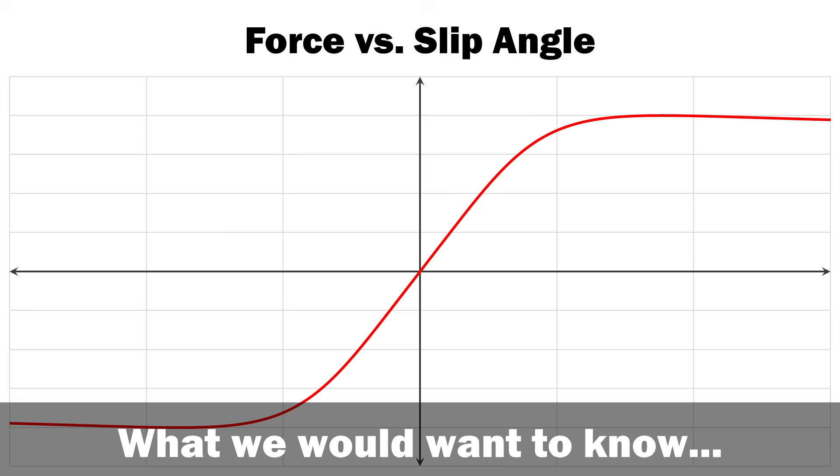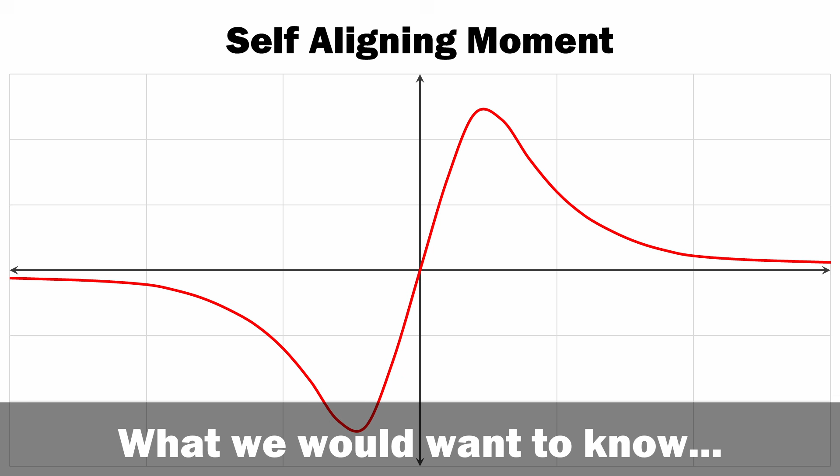If we wanted to make an ideal decision, we would want a lot of tyre testing data. A tyre's grip depends on the slip angle, slip ratio, temperature, pressure, load, and the camber we're running. We would want this test data for every tyre we're considering. We'd also want to know the self-aligning moment, so we can design our steering geometry, and the overturning moment, so we could better determine the loads going into the wishbones and hence into the chassis. We would want stiffness data - vertical, lateral, torsional - and a good idea of the lag of a tyre: how long it takes a tyre to generate its full grip once new conditions are applied.

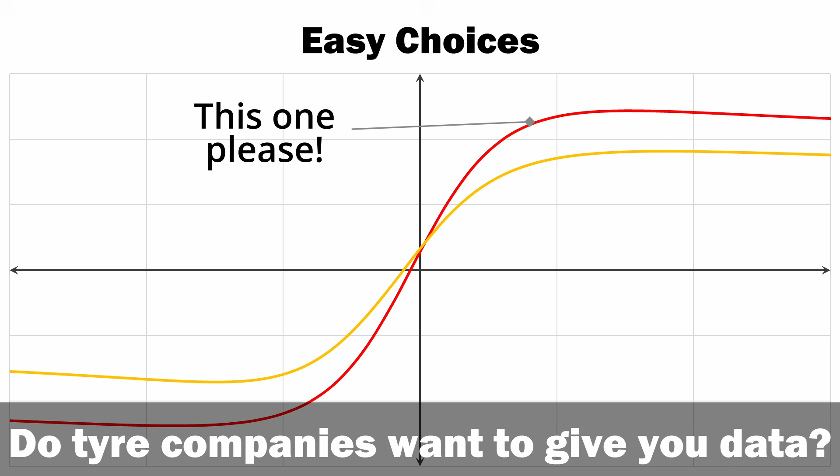Now, if you don't know a lot of those terms, you're not at too much of a disadvantage, because the tyre companies do not provide this. It's very difficult to get a hold of this sort of information unless you've got access to the testing data yourself. Tyre testing of numerous tyres is well outside the budget of this project, and anyone building a custom vehicle at home is really not going to have access to that data. I don't want to be cynical, but it's pretty obvious that if all the companies gave really accurate data about their tyres, there would be fewer choices people would make. If you're looking for out and out friction, you'd just choose the tyre with the best friction. So instead, we get less data, less valuable data, less depth in our data, and a lot more marketing.

Now, if we don't have that data, a really good substitute would be experience. If we had run all these different tyres on cars before, we would know how a particular tyre feels in a car, and if we're looking for out and out performance, which we're not on this project, we would also know the lap times we'd get. But I haven't built this car yet, and I don't have a huge amount of experience testing and tuning these sorts of tyres on cars of this size and power. So I don't even have that experience to draw from. Just like with a lot of design and engineering decisions, we're stuck not having perfect information.

But we still have to make a decision. So before making a decision, it's handy to think about the particular goals that we want from these tyres. And straight up, we're not building a racing car. And that means we don't need the best performance possible. We just want reasonable grip. In fact, I think I might have even chosen a tyre that might have too much grip for what we want.

Another thing to consider is that this is going to be an open top car, and I live in Perth. Perth doesn't have a lot of rain. Most of the time we have fine weather. And with an open top, I'm not going to be rushing out to drive this car in the rain very often. So I don't really need a tyre that has great wet weather capability. Just enough that if I am in those circumstances, I'm not going to get thrown off the road immediately.

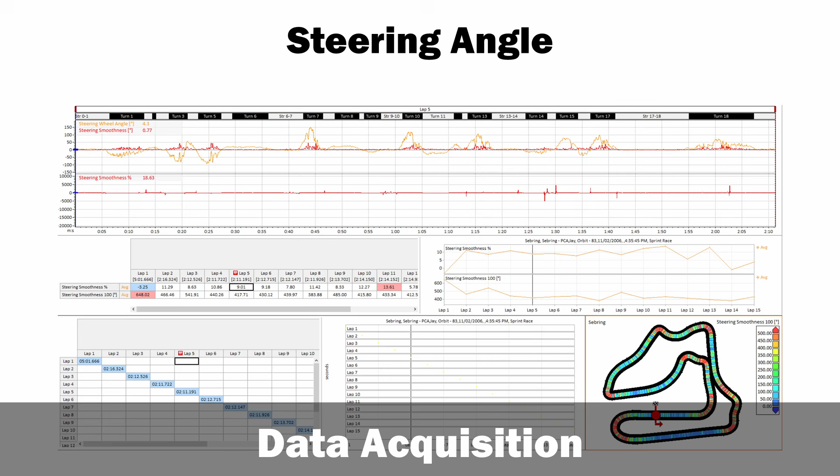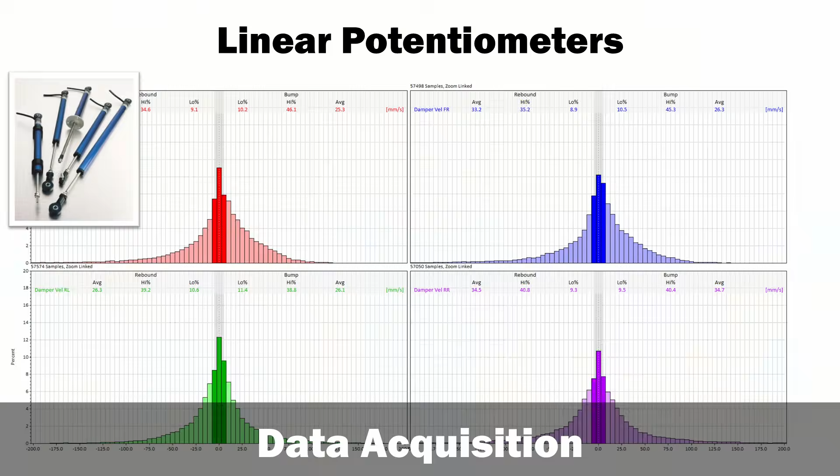If I go a little bit further, I can have sensors running on the car, things like steering position sensors, which give you an idea of how much you're working the front end, but I can also put tyre temp sensors on, linear pots to give an idea of the deflections in the spring and where the kinematics is going to be for a given suspension system. I can also look at putting maybe some strain gauges on the dampers to get some direct measurement of loads that will be going into the tyres. And if I get super adventurous, I might use a slip angle sensor.

Well, that's a little bit out of reach, isn't it? A slip angle sensor, they can cost tens of thousands of dollars. But if you happen to know where one might be sitting around that could be borrowed, like I do, might be an option come testing time.

So the main thing is not to pick the perfect tyre for the car, it's just to pick a family of tyres where there's a few different options. So I really need a short list of tyres that I'm going to run, because as you do lots and lots of tyre testing, that cost can build up quite dramatically. I hope I get it right out of the box, but I don't expect to be.

Most race cars don't work great out of the box, so testing's always going to be a part of the design process. The other thing that I'll need to do is make sure that there's decent adjustment in the suspension system, especially when it comes to things like toe, which you'd want adjustment for anyway, reasonable amount of camber adjustment, and of course we can adjust the pressure on the tyres as well. Springs and anti-roll bars are going to be the main things that we can work with, and for the transient maneuvers, a lot of damper tuning as well.

So developing the tyres on the car is more than just the tyre choice, and a lot of it, because we don't have that data at the beginning, we're going to have to do in a testing regime. So I did mention that I've chosen the Toyo R888Rs, and it's worthwhile thinking, why did I choose this tyre?

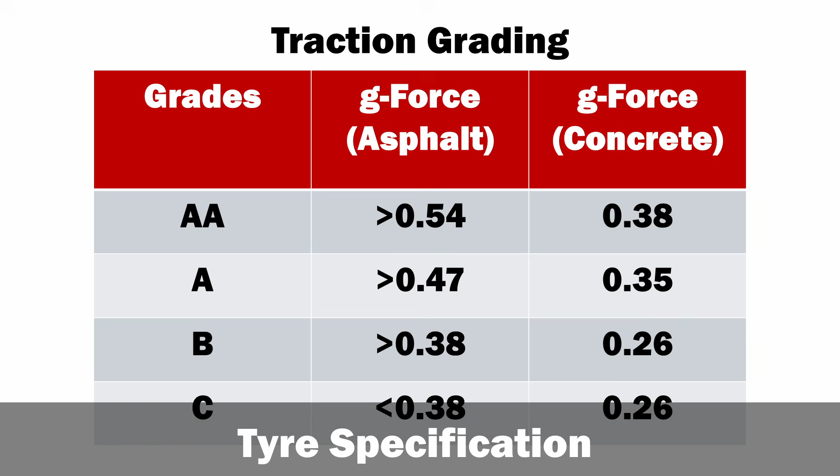First, the tyres have a traction grading. So this could be AA, which is the best traction grading, A, B or C. And these are graded at AA. These are determined using particular tests. Now, what makes a grade AA is pretty low G-forces. So there's a lot of tyres that could come in that region, but at least if it's an AA, it's a highish grip tyre. The other number that we have is a tread wear number.

Now, we would think that tread wear is really just about how the tyre wears. So the idea there is the higher the tread wear number, the slower the tyre will wear out. So the tyres will last longer. Now, I'm going to use that as a proxy for rubber softness. The softer the rubber is, it will likely have a lower tread wear. The softer the rubber is, it will likely have a higher grip.

Now, tyre wear is not something I'm going to be worried about, one, because the car is going to be really quite lightweight. Second, because it's not going to be driven a huge number of Ks in a year. And finally, because if the cost of having a little bit of fun is that we need to change the tyres every so often, that doesn't really worry me. So I'm looking for pretty much the lowest tread wear I can get.

Now, the lowest tread wear tyres I could find for on road were about 80. These Toyos come in at 100, which is pretty good. So I got some indication that this is going to be a fairly high grip tyre. Now, going along with that, I do intend to put this car on the track every so often. So I want it to have a fairly good temperature rating, or something that is going to handle reasonably well as the temperature increases. And similarly, tyres are given temperature grades, so A, B and C, A being the best.

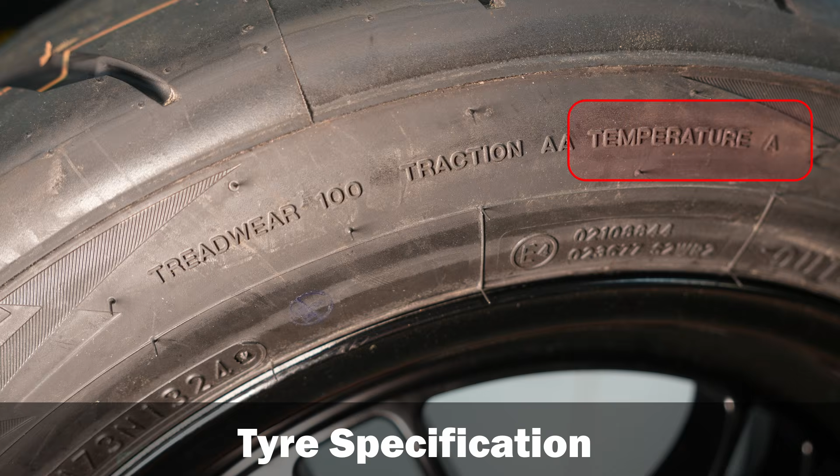When it comes to temperature grade, this is a grade A tyre. That means as we get it out onto the track, there's a reasonable chance we're going to be able to run at different, elevated temperatures without too much loss of grip or handling in our vehicle.

Now, one of the things that's probably most important to consider is what size we're going to run on the tyres, and that's really going to link to our wheel size. In an odd way, I think the decision about our wheel size is far more important than the decision of the tyre size, because we're going to be able to replace tyres, but the size of the wheels is going to determine a lot of things.

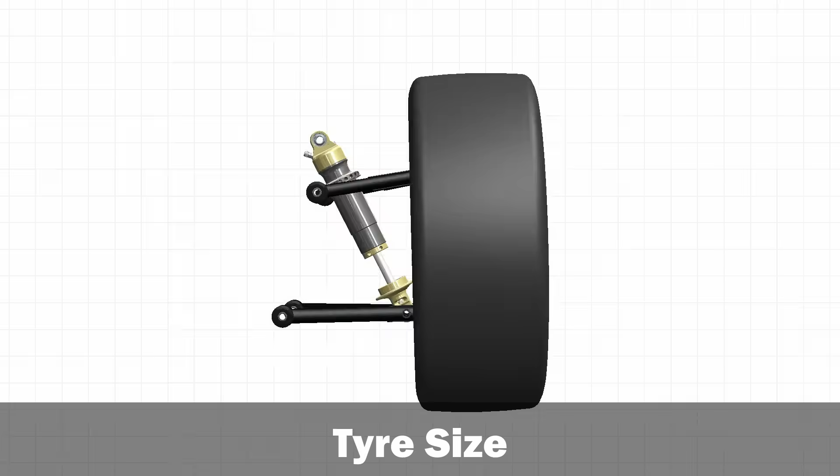It's going to determine our packaging of our suspension system and brakes, and it's also going to have a big impact on our bodywork. So if we want our bodywork well fitted to the wheels, we need to decide those sizes pretty early on. We can change tyre types, but there's going to be pretty big limits on what we can do with wheel sizes.

Now, the whole idea of Project 171 is to build a car that harkens back to the 1950s, something that gives us the same feeling and approach as something like a Porsche 550 or an Austin Healey 100. If you look back in the earlier videos, we show some cars we used as benchmarks for this project.

But this car is going to have more power than those 1950s sports cars, and I'm not that interested in running tyres similar to the tyres back then, even if you could get tyres of the right size in reasonable compounds. While I want a car inspired by the 1950s, I don't want the performance and handling of the 1950s.

Now, if we look at that Porsche 550 and the Austin Healey, what we see is wheels with reasonable diameters—so we're talking 15, 16 inch wheel diameters—but tyres that are very narrow and have really big sidewalls on them.

Some of that is because of the conditions of the day. Roads have got better since the 1950s. And if you want a car to handle reasonably well over bumps and disturbances in the road, a good amount of height in your sidewall is well worth it.

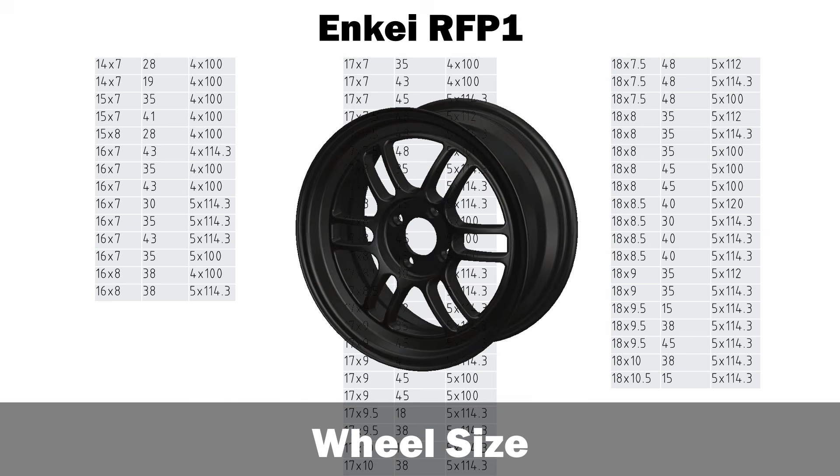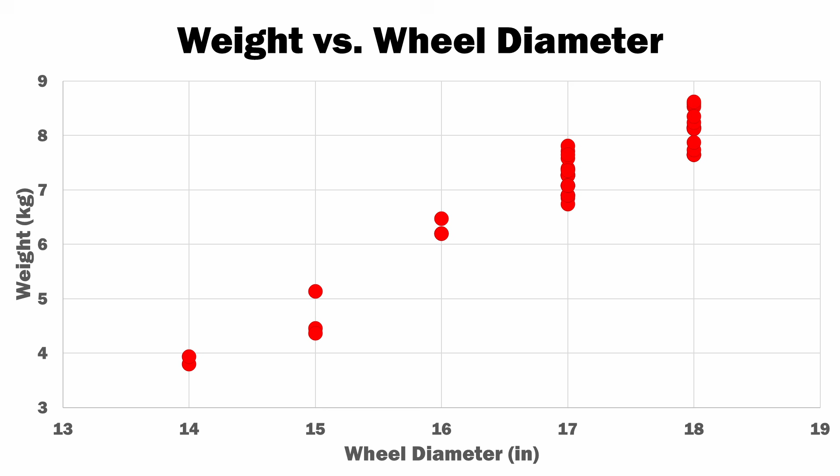Now, when it comes to the actual wheel size, I didn't want something too big. If we look at the Enkei RFP1s, which are the wheel I've chosen, we see a whole heap of these wheels at different sizes, and a really strong relationship between the weight of the wheel and the outer diameter. As we increase the diameter, we get a big increase in weight—and lightweight is one of the absolute fundamentals we're trying to achieve with this car.

Now, because this car is going to be fairly lightweight, I could probably even package the brakes we're going to need into a 13-inch wheel. That'd be about the minimum I think I could package what we need into this car.

But there's a problem with that: when we look at tyre availability, there's some really good competition and track tyres available at 13-inch size, but not a lot of really good road-going or high-performance road car tyres at a 13-inch rim size. If we go up to 14-inch, one more step, we see very few tyres available there.

14 inches was a common tyre size for, say, an MX-5, and a lot of people with 14-inch rims will increase it by one inch to a 15, which gives much larger tyre availability. Using the Toyo R888R as an example, there's only 3 options for a 13-inch rim, and only 1 option for a 14-inch rim. Once we get to the 15s, there's actually half a dozen, realistically probably all the sizes we're going to need.

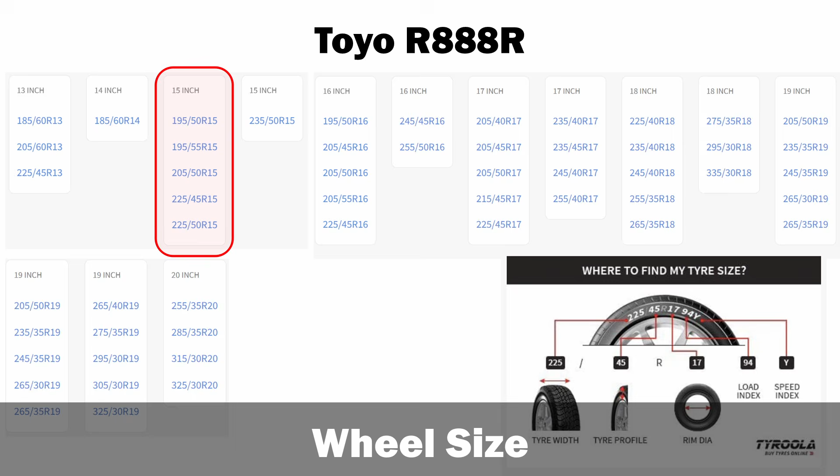So we can probably expect that into a reasonable time in the future we will have decent tyre availability and different options for any wheel size that's 15-inch and larger. That tends to be a very common size for lightweight cars like Caterhams. For people mainly using them on the road, 15 inches tends to be about the right rim size.

Looking at the availability of options when doing engineering style work is really important. Even though something might be listed as an option you could get from the manufacturer, it doesn't necessarily mean that option is going to be readily available. When I was buying the Enkei wheels, there was really only 1 offset and 1 wheel width that was readily available, and I do want to keep to readily available components. That gives you a fair chance of finding replacements further into the future.

That landed me on a 7-inch wide Enkei rim. That's pretty good news for these Toyo tyres, because they have tyres ranging from 195 millimeters wide on the tread to 225 mil wide. If I want to go any wider, I'd have to look at a 16-inch wheel, which I wouldn't rule out for the rear, but I'm going to try to avoid it. All of those tyres will fit on a 7-inch wide rim.

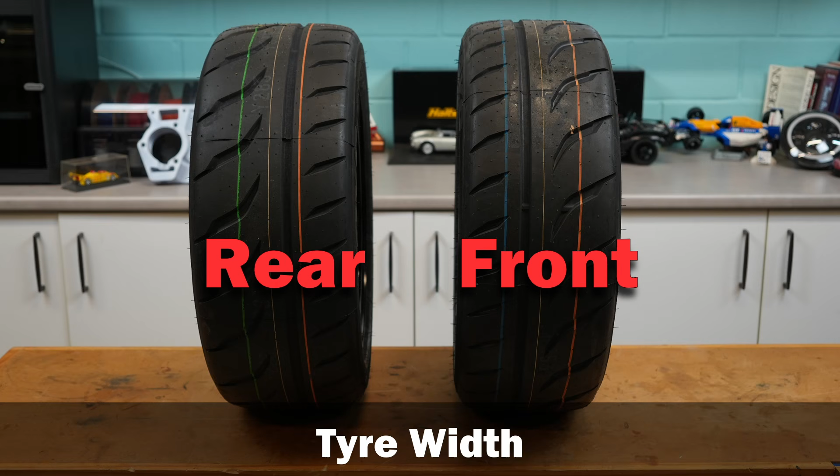I have chosen to go for 195 wides on the front and 205 wides on the rear - slightly bigger aspect ratio for the front tyres, but overall these two tyres have about the same diameter, one's just a little bit wider at the rear. I don't think we've got enough time in this video to explain exactly why I want a slightly wider tyre at the rear - that's going to have to follow in future videos.

But it's not uncommon to run a wider tyre on the rear than the front for a mid-engine car. Even looking as far back as those Porsches in the 1950s, we saw an even bigger difference than this. And this width difference almost perfectly matches some of the Generation 2 MR2, the Toyota mid-engine car. There's a chance I haven't gone wide enough on the rear given how much weight we expect there.

I do want to try to keep it roughly the same width front and rear, because under braking we still tend to load up the fronts more than the rear, and that's one of the more critical handling situations for a road going car. But we do have the ability to go to a 225 on the rear on the same rim.

That's going to mean a bit more bulge on the sidewall, and might mean we get a little less lateral stiffness in the tyre, but that's a question I'll answer during testing, not so much in the selection process. At this stage I'm quite happy with this breakdown of slightly narrower front than rear, slightly different aspect ratio. That's fine, I can live with that. I'll go and test that on the track.

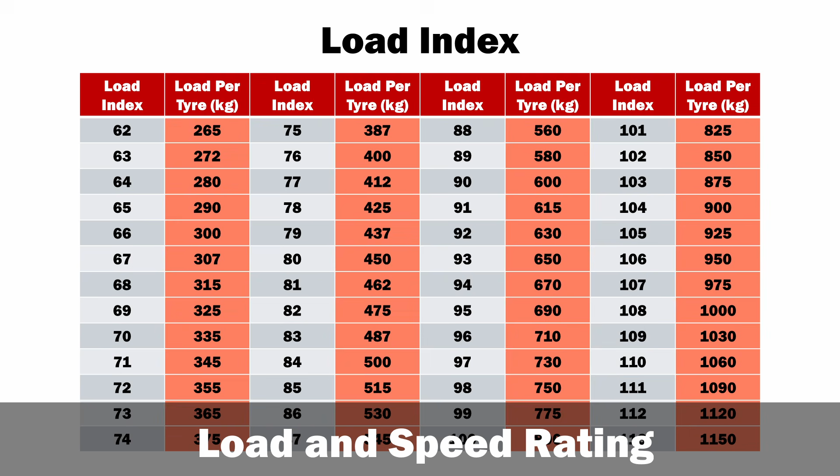There's a couple of other bits of information on a tyre required for specification. One of those is load rating. Both the front and rear tyres are slightly different, but they have the same load rating, which is 89, meaning both tyres can handle 580 kilos per tyre. That's pretty much the expected weight of the whole car being run on each of these tyres, so that's not going to be a problem.

In fact, it could indicate that the tyres are just oversized for the job. Again, we're going to find that out when we go testing.

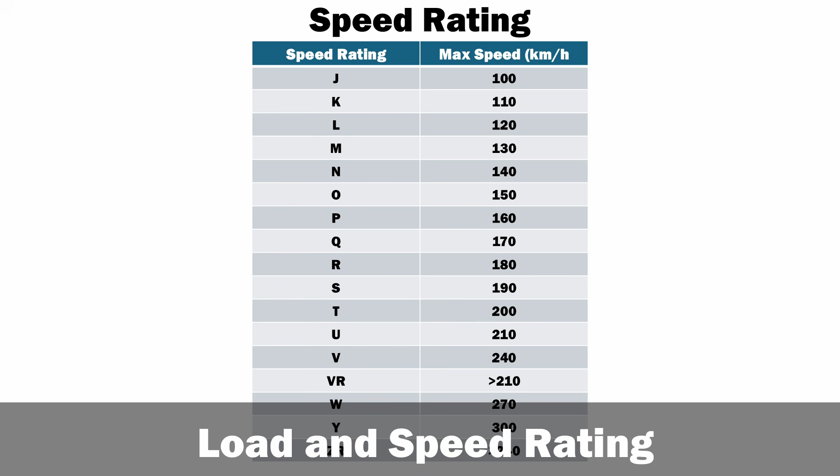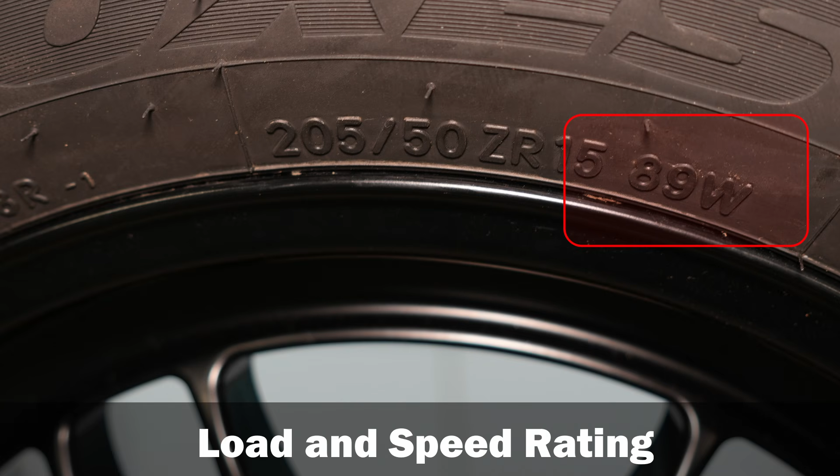The other thing that goes with the load rating is a speed rating, and this is where these tyres are a little bit different. The front tyres I've selected have a speed rating of V, meaning they're capable of going up to 240 kilometers an hour. At the rear, the speed rating is W, which means the rear tyres will be able to go up to 270 kilometers an hour. That's going to be really good news if I have huge amounts of power and I'm able to spin the wheels at 240 k's an hour, but in reality, it's not going to matter.

We saw when we did the aerodynamic analysis of this car with an open cockpit, it's going to be a reasonably high drag vehicle. We're not putting a turbocharger in this car to start with. That means we're really unlikely to have a car that's going to exceed 240 k's an hour anyway. If we take this car out on the track, the top speed is far less than what you can do on a complete speed run, because you've got limits on how long the main straight is. So the car will not exceed 240 k's an hour on a racetrack, even if we did put a turbocharger on and increase our power. So I think we're pretty safe with a V speed rating on these tyres.

Needless to say, the maximum speed limit in West Australia is 110 k's an hour, and I'm designing this car not so I can do really high speeds. I want it to be fun as we're going around twisty, winding roads. So no problems with either the load rating or the speed rating on the tyres.

Now I know for a lot of people watching these videos, the information and decision-making process I've used to decide these tyres might feel a little bit unsatisfying. Maybe you wanted to see us go through tyre data. I wish. I would have loved to have had all of that information for all the tyres we're potentially going to run. But I just don't have that luxury.